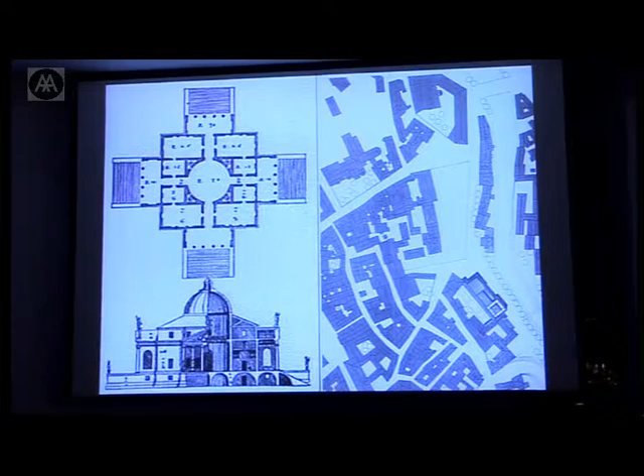Afterwards, I moved on to a master's in Stuttgart University, where I was confronted with new concepts of architecture. One was the concept of the digital. That was in the 90s, and the first wave of digital architecture was very much about creating shapes and pixels that moved in space, and not every single one of these pixels necessarily needed to make sense.

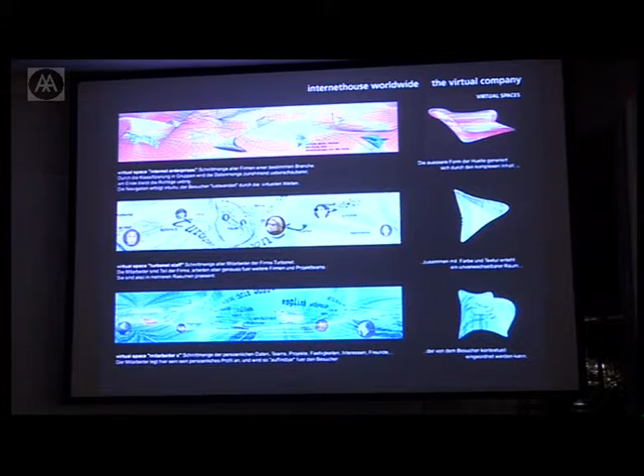My project was about virtual realities, representing real space in virtual space, creating environments in VR caves, where with goggles and data gloves you move through spaces, but they're not real. There's no gravity, there's no environment, but there's perception. You can see these spaces, but you can't feel them, but you're in them.

The second concept was the concept of form finding at the Institute of Lightweight Structures by Professor Frei Otto. Frei Otto at the time said he's not designing, he's finding shapes. He sees himself as a researcher, and he investigates shapes in nature or structures in nature, finding optimum configurations of structures rather than designing them the way you want them to look and then figuring out how they stand up.

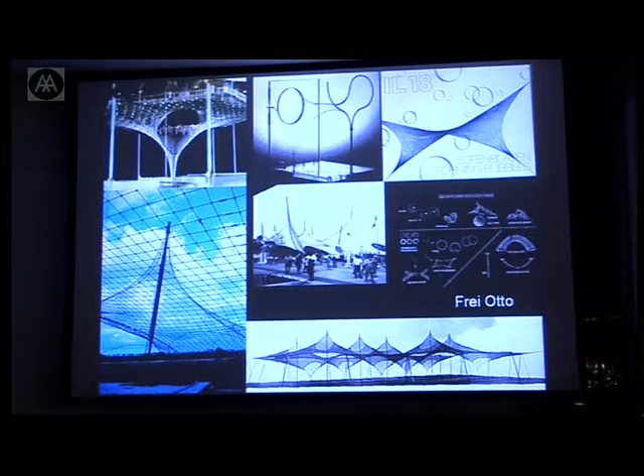One of the most prominent examples is the Munich 1972 stadium, which is entirely based on the surface tension of soap films, and therefore still today one of the lightest and most filigrane structures in the world.

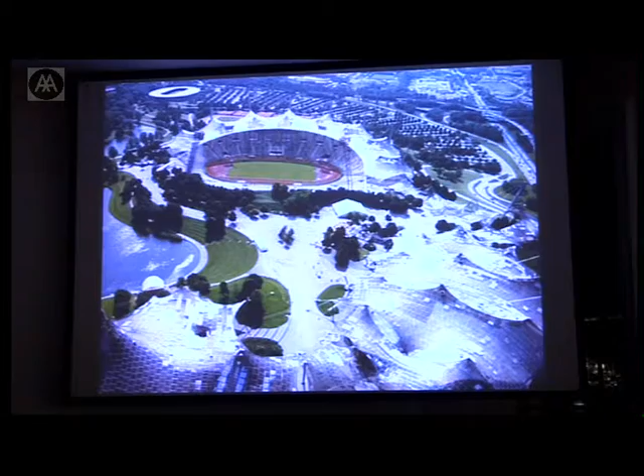Hence my interest in complex systems in nature and their possible applications in architecture, whatever these applications may be, whether spatial, conceptual, programmatic, or as an application of ornament.

As Charles introduced me, in 2002 I worked for a German firm called SMO Architektur, and we participated in a competition in Berlin. One of our students had Charles as a teacher at, I think, the Städel School in Frankfurt, and she suggested working with the Advanced Geometry Unit in London. So we came here in 2002 and had a workshop.

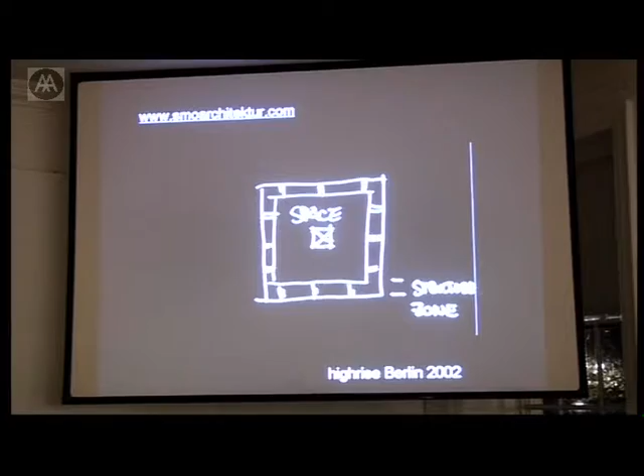The ideas behind the concept were that the perception of current architecture is a pure repetition of floor plans that is then retro-clad almost, and facade is nothing more than cladding of a highly efficient structure that is a given almost by a developer.

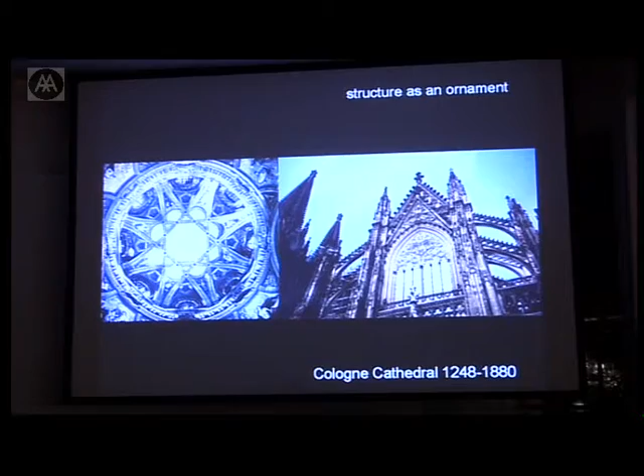While originally structure and appearance went hand in hand, the cathedrals, every element of architecture is at the same time an element of structure, and every element of structure has an architectural expression.

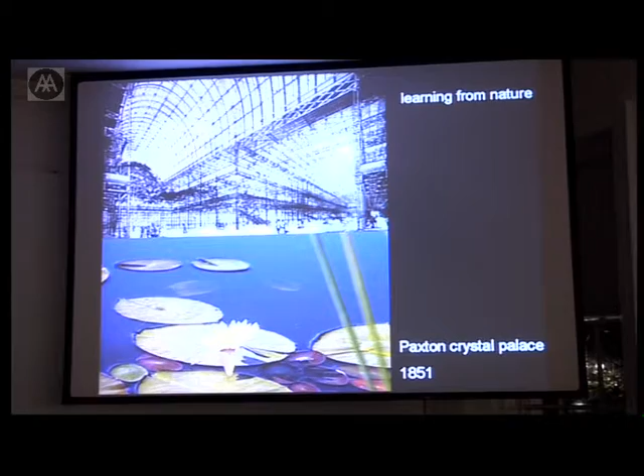Later, Paxton's Crystal Palace and other projects are examples of how this structure turns into the architectural experience and becomes inseparable. And often these structures are learned from nature.

Buckminster Fuller, another person in that field, built this pavilion in Montreal, I think 1968, where you can't really tell what is structure and what is architecture. It's a unity.

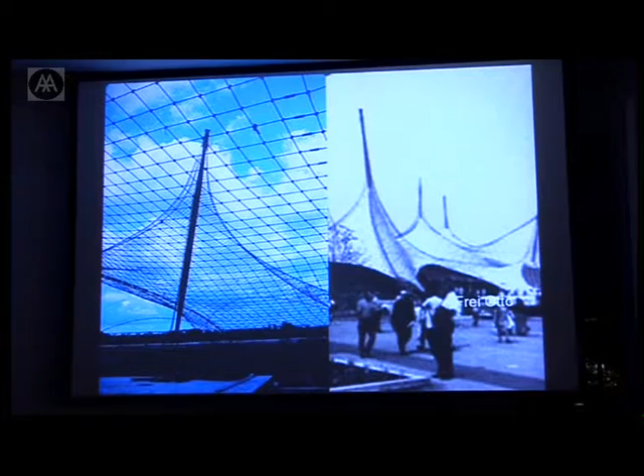At the same time, Frei Otto was building the Montreal pavilion, which later led to the Munich stadium based on surface tension. Frei Otto also wrote a book by the name of Seifenblasen, Forming Bubbles, and we'll see later how this book comes to relevance.

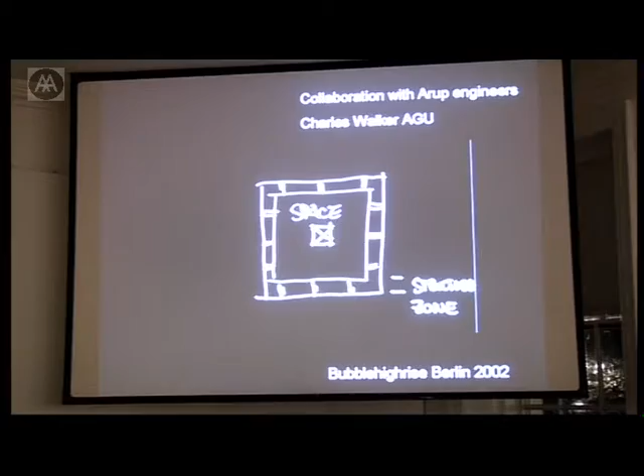The idea for the high-rise tower, and this was basically what we came to London with, was we wanted a structure that at the same time is architecture, a structure that represents nature, natural systems, organisms, and that is not just an extruded floor plate clad with a funky facade.

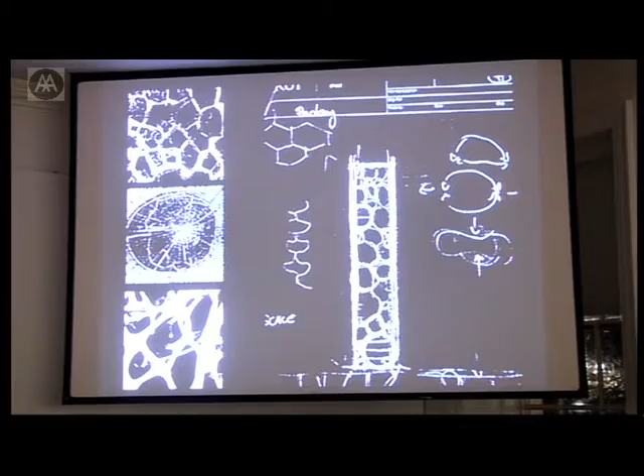After a one day workshop, we had these sketches and the word packing. So packing meant for us, we put spheres in a box and shake the box, and all the spheres would self-organize themselves, leaving the minimal amount of space in between them. So you have some sort of structural package, although highly undetermined or underdetermined.

When we then sliced through this structure, or through this undetermined accumulation of spheres, we would get a slice of somehow a determined structure that we would wrap around the building, so the structure and the facade become the same element.

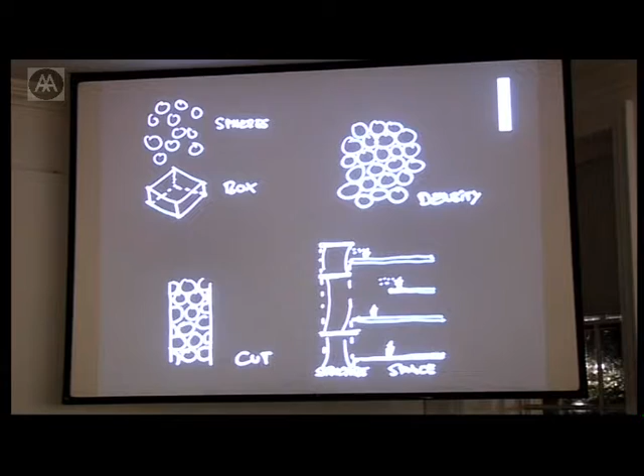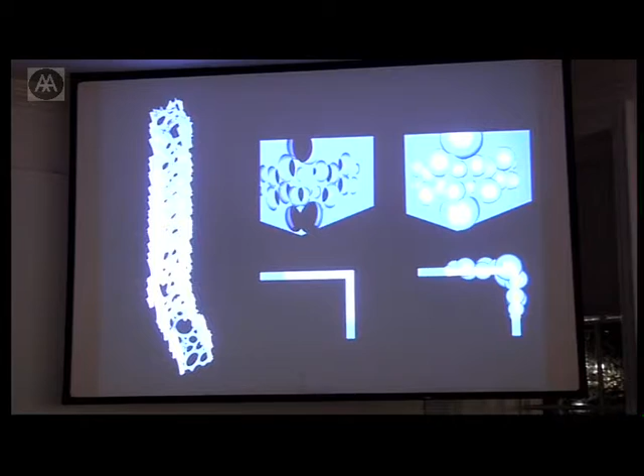At the time, we weren't 100% able geometrically to resolve this problem. What we did was simply modeling the bubbles, the spheres, in Max, and subtracting them from the volume.

About the detail, we had a very blurry idea at the time, and it actually stayed at that level of resolution. But we had a high-rise building that looked highly unusual and looked different from anything else we had ever seen.

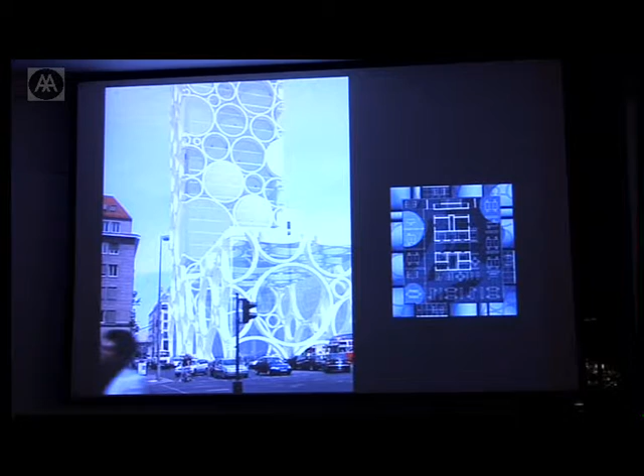Within Charles' advanced geometry group, I think everybody knew we were onto something, but nobody knew what it was. There was a certain excitement about this project. The only person not excited was the developer, who decided not to go ahead with it.

The last thing we heard was this page faxed to us from Charles, which was a copy from the Frei Otto book, that somehow talked about these rings or these spheres under compression turning into some sort of three-dimensional structure or foam or hexagons.

As remote as Australia sometimes seems from this side of the world, it is actually quite close to a lot of places. While Australia has 20 million inhabitants, it also has 20 million border movements every year, so statistically every Australian leaves the country once a year. In America, for example, I think the percentage of travel documents is something below 15%.

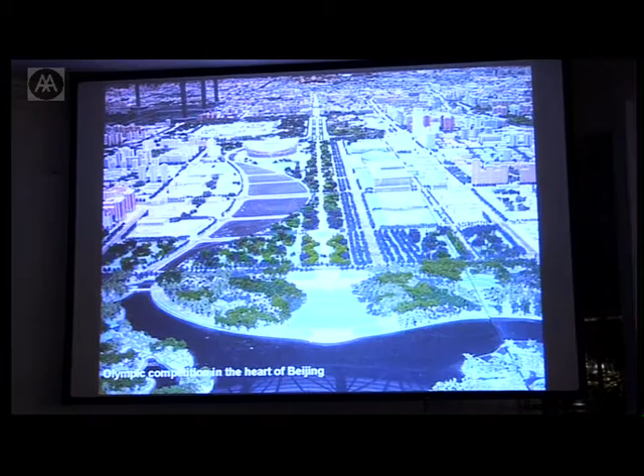We were invited to join an international competition against some of the biggest firms in the world for the National Swimming Center for the Olympic Games in Beijing 2008. The site is in the center of a north-south axis that takes you from the Forbidden City to the north, which is now the Olympic Park.

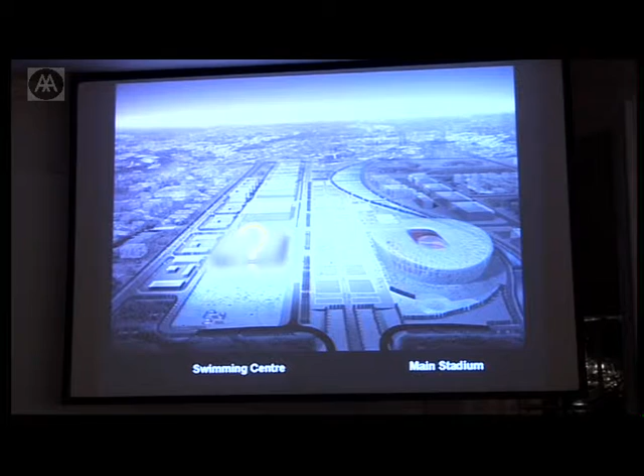You see on this image the team, and the main stadium by Herzog de Meuron, which was a competition that had just been decided at that stage. So we knew what our neighbor was, which is highly unusual for competitions like that—it was almost like designing in an existing condition. We had a big circular building called the Bird Nest, and somehow it was painted red on the inside and symbolized fire.

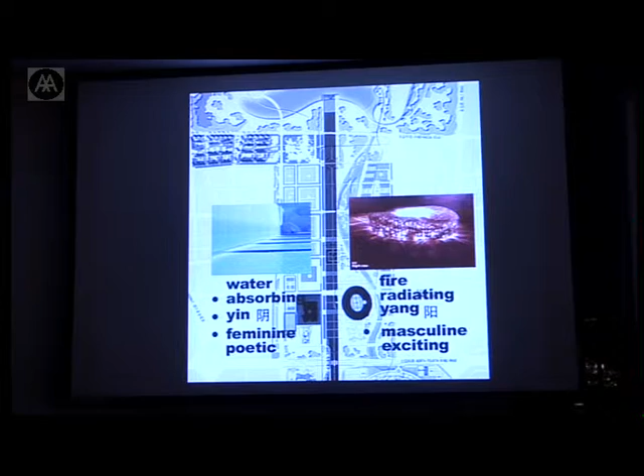Reading the symbolism of the main stadium as a big ring of fire, which in Chinese philosophy stands for yang, you need an opposite, complementary element, which is the yin—in this case water, a feminine counterpart. So we decided on a blue building that interacts with the red building, a square shape, and water as a theme, which made sense building an aquatic center. The square shape is the primal shape in Chinese architecture.

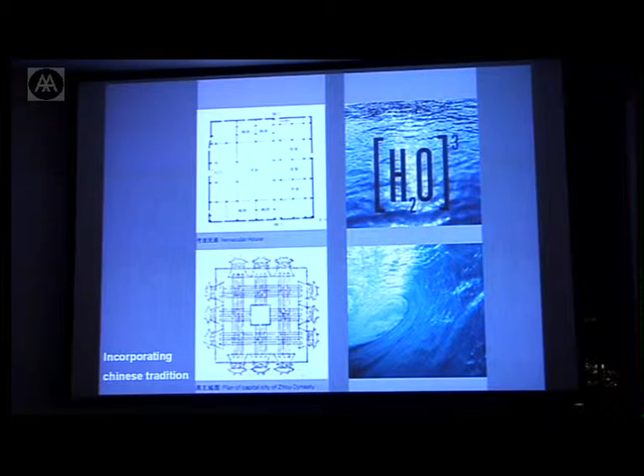The Forbidden City is square. The Summer Palace has a lot of square buildings. The Temple of Heaven is square. The history of Chinese architecture goes back thousands of years, with a strong linkage to the man standing in the middle of a square with equidistance to all sides. So there was a strong reason for this shape, and it also made sense putting a square next to a circle—we had a blue box and a red circle, yin and yang.

So the spirits were happy already, but we had no idea what to do with it. We looked again at nature for inspiration, and this time we looked more into elements of water—corals, bubbles, foam—and more specifically into what could be relevant for our building, creating a building that is not structure plus facade, but structure and facade in one. We applied the system we had previously found, and it made sense as a block of foam, somehow representing water.

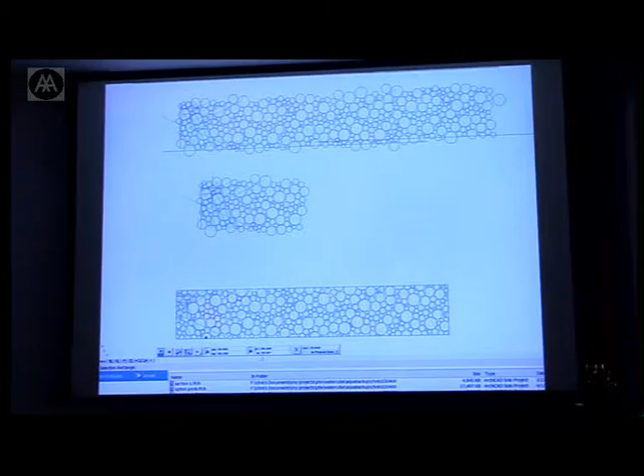Now, as much as the computer liberates us from having to be able to draw everything, it also limits us to what you can draw on this particular program or with this particular computer. This drawing here is a 2D drawing that represents some form of foam, but it doesn't really represent foam because foam is three-dimensional—this drawing is two-dimensional, so it basically reads as an array of circles.

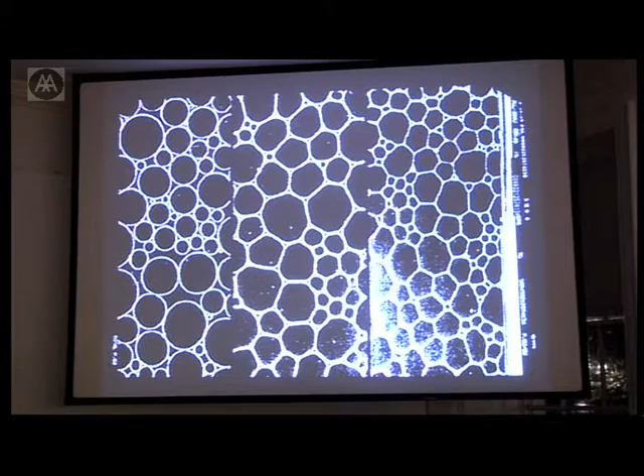Remembering the facts out of the Frei Otto book, we were on the hint to look more into foam. So we mapped the foam onto the building, and all of a sudden we had something more three-dimensional that would fully represent water for us in a built form. It's almost like a block of water.

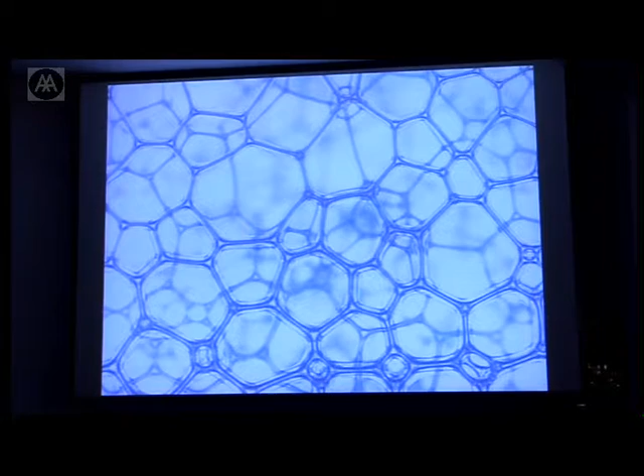That's seemingly a contradiction. Looking closer into the geometry and structure of foam, something that many people have done in the past, you find on Google that there are certain theories about the geometry of foam. One of the oldest, dating back to 1873, finds that all the angles between three adjoining bubbles are 109.4 degrees, and they all join at the same degree. The latest...

foam theory was found on an Irish website by two Irish professors, Professor Weaire and Phelan. They state that if you mix 12-sided polygons and 14-sided polygons three-dimensionally in space, and array them endlessly, you would have a structure that doesn't leave any spaces in between. While our bubble model with the chewing gums earlier left spaces in between, now we have a highly defined package with no spaces in between, and a package that has a very limited number of different edges and nodes.

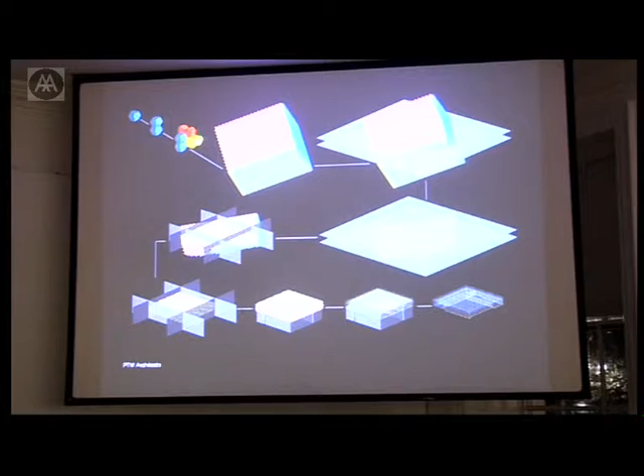So as a principle of how the structure derives from that, we have two different geometries that array in a cluster of six. They array three-dimensionally into a large amount of theoretical foam, theoretical physics foam, that we then slice into the volume that we want to achieve, the volume determined by site conditions, program, and so on.

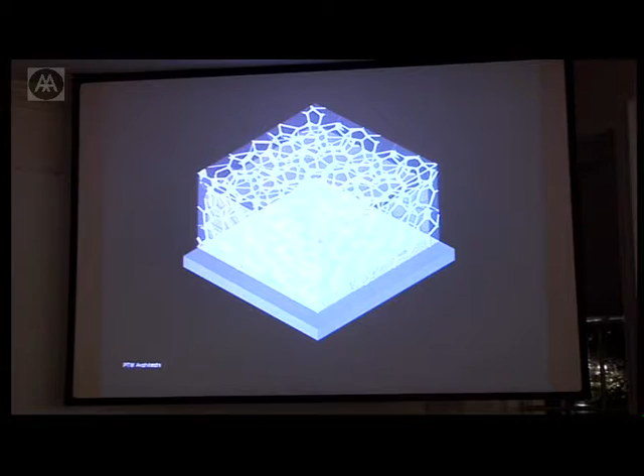And from the first data model, the first three-dimensional computer model, which was so much more sophisticated than our early 3ds Max model, we managed to get a physical model built with a process referred to as stereolithography. I think that's nowadays quite a common tool—you probably have one in the school here too—where you have some sort of resin or powder hit by two laser beams, and where the laser beams hit, the material becomes solid. So any three-dimensional geometry, if you're able to determine it in the computer, you can build it.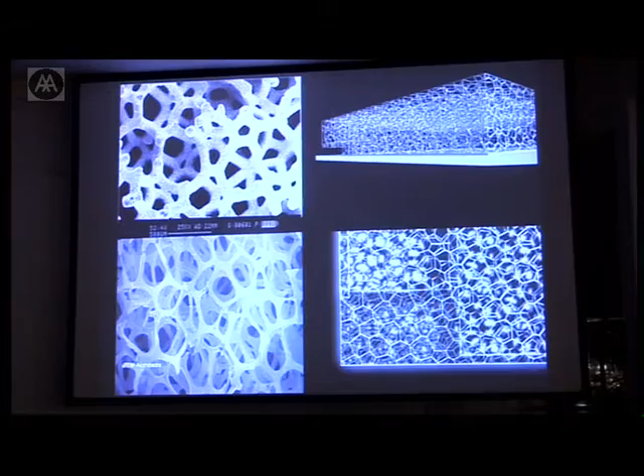And that then arrayed to the entire building, which is 200 by 200 meters and 35 meters high. We have 22,000 elements and 12,000 nodes. Despite the high degree of repetition, when you look at the original images of microscopic foam, there's such a strong similarity that it still surprised us. This geometry apparently is the most common geometry that you find in nature—in little animals, in foam, in coral reefs, and even in the nose of my dog.

This block of foam, 200 meters by 200 meters, 35 meters high, is excavated to accommodate the spaces: an Olympic pool—the biggest Olympic pool in the world—a diving pool, a 50-meter pool, warm-up pools, a leisure center, and an ice rink. All these spaces are literally carved out of the geometry, but they could be in any shape. You could carve out any shape of this geometry, and in theory it would still be stable, because it's fully three-dimensional, and you could put the entire building on its side.

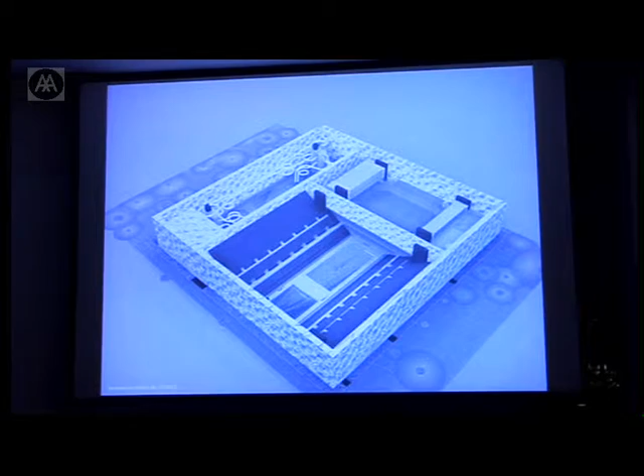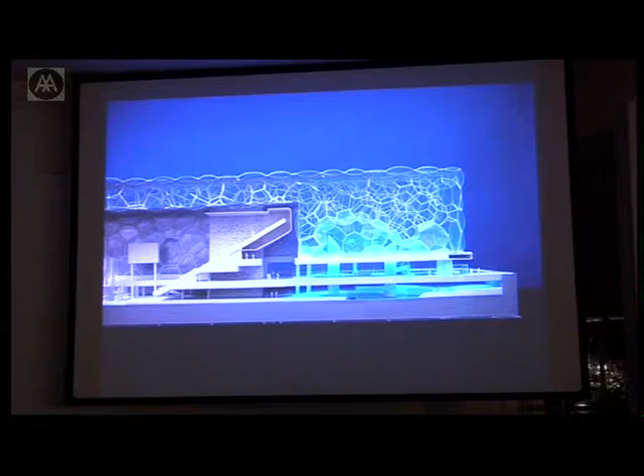It's a non-directional structural system, which proved to be extremely efficient for Beijing, which has seismic conditions—earthquakes. Here you see another sectional model where you see spaces carved out of the structure, and the space on the right we refer to as the bubble bar, which is the restaurant and a sort of VIP bar that sits above the entry. To the left you see two spectator ranks with 17,000 seats and the diving tower.

Talking about models in China nowadays, you have incredible industries of model making, 3D model making as well as physical model making. These guys in Beijing have now specialized in building Watercube models, and they literally build Watercube models and Bird's Nest models on a daily basis. You have these 10 guys, and it's like an assembly belt—everybody has a fixed role, and they know exactly what they're doing. So you can ring them up and get a model built.

While we previously thought nobody would ever be able to build a model like that, they have now figured out how to go from our 3D computer geometry to building it in reality, which is a big step, because if you can build a model, it's more likely that you can build the real building as well.

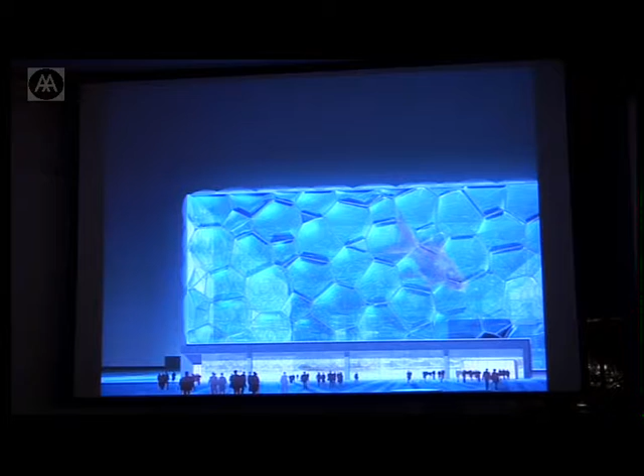This is one of the facade impressions, or the external impressions, where you see the structure and the facade becoming the same element, and the structure shining through, sort of a layering. That is something we wanted to achieve, and we wanted to learn from water as well, this effect of layer, where the eye doesn't know where to stop. It sort of has an endless depth.

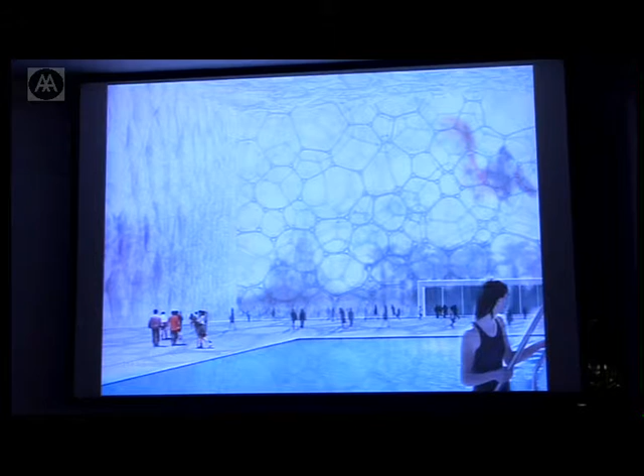And an internal impression of being underwater or under a block of foam, sort of an ephemeral view.

As Charles mentioned earlier, the Eden Project in Cornwall was a project built, I think, 10 years earlier, which uses a facade technology derived from the space industry, whereby inflated plastic pillows are used instead of glass. These plastic pillows can span up to 9 meters, and they weigh only 1% of the weight of a comparable glass structure. It's highly transparent, highly UV resistant, and practically undegradable material.

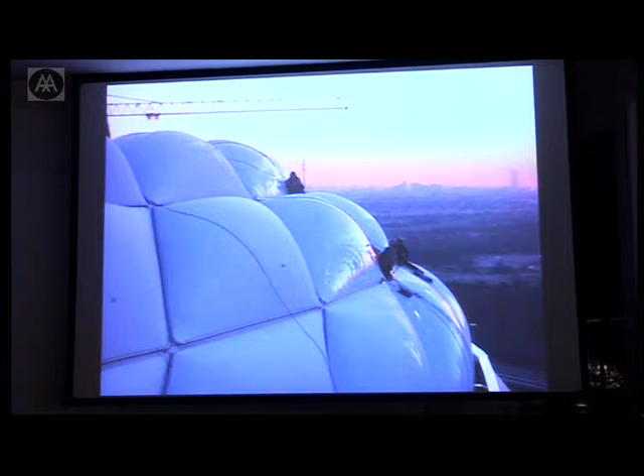The next project of my knowledge is the Allianz Arena in Munich, that has come to fame last year in the World Cup.

So basically it's really a thin film of plastic, 0.1 millimeters thick. You can't imagine that something like that can carry any load, but it's extremely strong, extremely transparent, and extremely undegradable. NASA invented it originally to shield satellites.

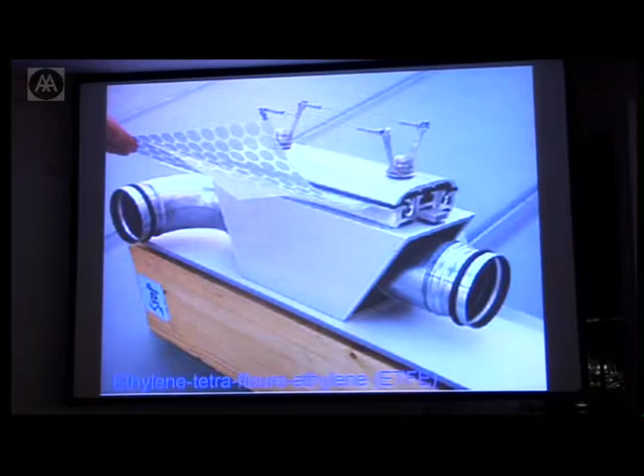The system works so that the foam structure is the internal structure that on both sides is wrapped with this lightweight material. Solar energy is captured in between and can be used to heat pools and interiors. So you create like a greenhouse environment that is highly energy efficient.

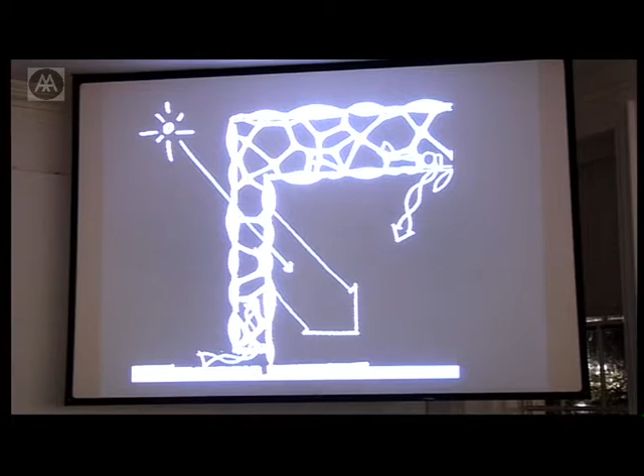And you have a daylight situation. Usually pools are just black boxes, and then on the inside you have to spend a lot of electricity and money to light them again. This is how the system works with clamps.

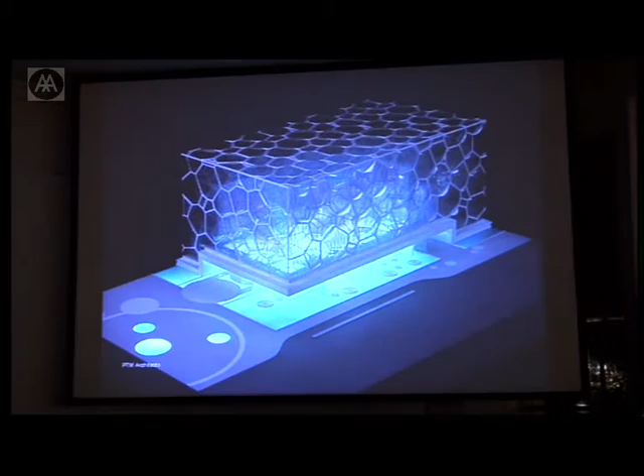That was our competition entry for the National Swimming Center, sitting next to the Bird's Nest. Out of the 10 entries, it was first shortlisted to 3 entries that were on public exhibition.

With an overwhelming majority, the public voted for our building, which was obviously a strong, very nice compliment for us, and a very strong argument that the population accepted the building in its simplicity and yet being so different. It just seemed that these two buildings work together so well that now people say the Bird's Nest got its justification afterwards by adding the Watercube. It's almost like there was something missing before.

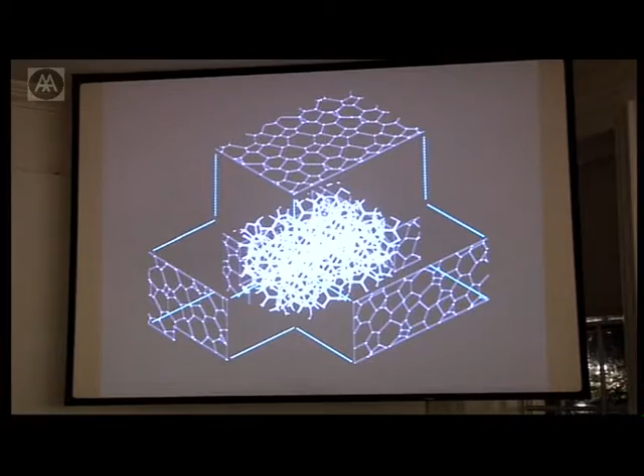From there, every necessary information can be extracted from that model, and our partners from Arup in Australia, and I believe with the help of Arup London, have developed an automated system whereby every single beam and node can be described in this numeric model, can be calculated, can be weighed, can be costed, and can be sent straight to the steel manufacturer from where it gets to site.

And that's probably what 30 years ago, when Frei Otto was playing around with the same ideas, wasn't available, where you would have to build physically every single member and somehow stress test it to be sure what size it should be.

All these elements have different dimensions, and the big advantage is that they carry only the load that they have to carry. While traditionally you would size the biggest member and then all the steel members have the same size, it's a big waste of steel and the structure gets very heavy.

While here, the members carry only the load that they have to, and you have a very efficient structure saving steel. All the necessary information, elevations, anything you need, cutting patterns, can be derived from this model, and the details are all resolved 3-dimensionally within this model.

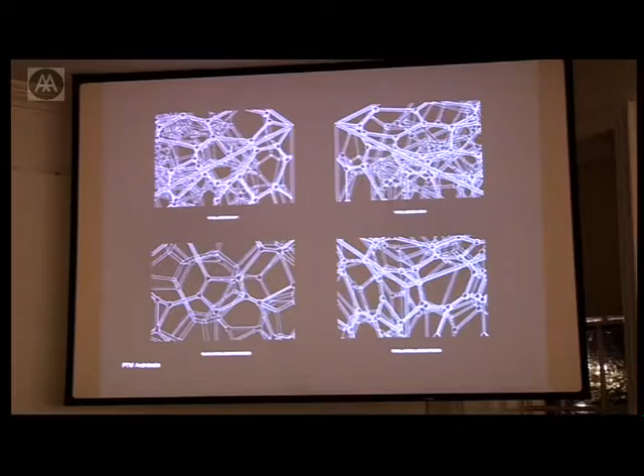For the interiors, again, we were inspired by water and bubbles and randomness and transparency and reflection, and that became an ongoing theme throughout the building.

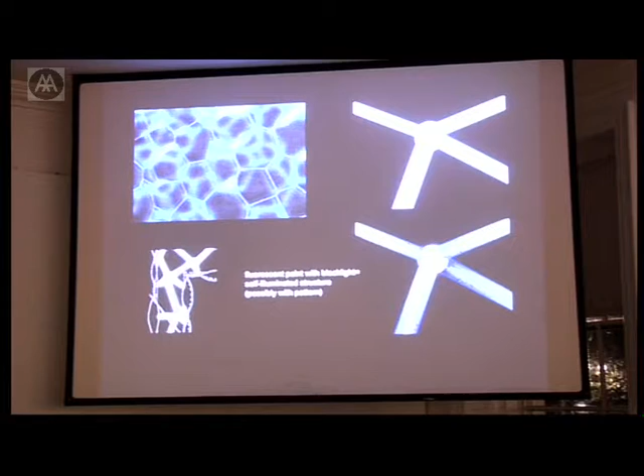The idea of seeing something glowing within the building at night, the idea of painting the structure with a fluorescent paint that glows at night, and the idea of having reflections like the surface of a lake, something undetermined, not a light here, light there on a grid, but light that moves around the building.

Doesn't run very smoothly here, but with these buildings or with this material, it's probably very difficult. Light is always very difficult to simulate, but in particular if you have all these different layers of the structure, all these layers of plastic material that absorb the light differently, it's almost impossible to really predict the final outcome. This was one of the attempts.

Using LED technology, you can achieve any color you want. And with great power comes great responsibility, because 3 of these colors obviously we don't want, and we have to somehow avoid that someone ever switches the yellow on.

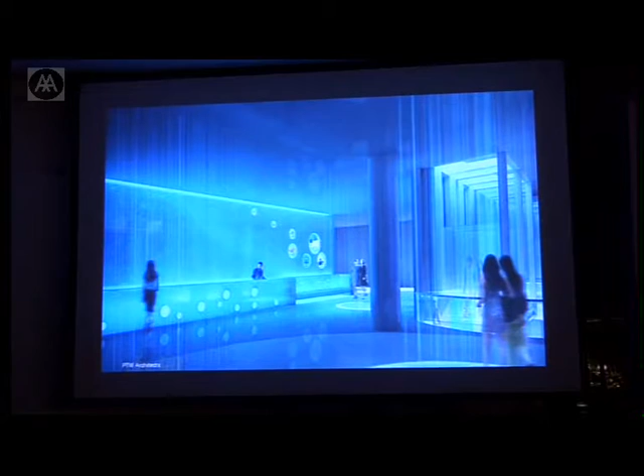The interior is only briefly the concept of randomness and sort of softness and blueness goes through the interiors, with all the corners being rounded.

Random light circles. To our big surprise, in 2004 we were invited to the Venice Biennale, and when we arrived there we got awarded the award for the best project in our category, which was previously unheard of for an Australian company.

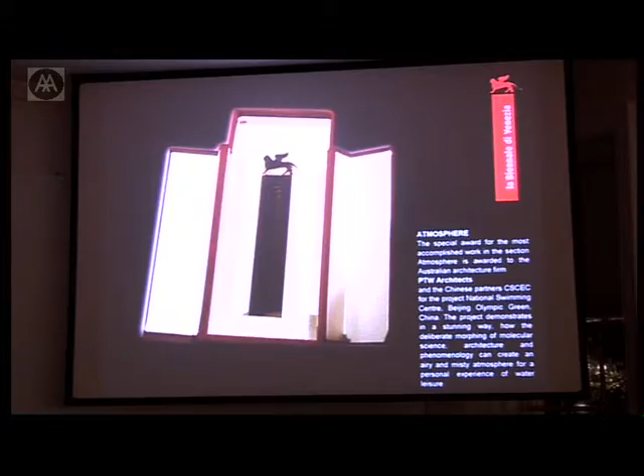And soon after, the project got into construction. So again, working in China makes things different. In China, you don't prefabricate a lot of things. You make up for it with a lot of manpower. So on the first day of construction, the groundbreaking ceremony, 2,000 site workers showed up, and these 2,000 people would keep going for the next 2 years building this building with great pride.

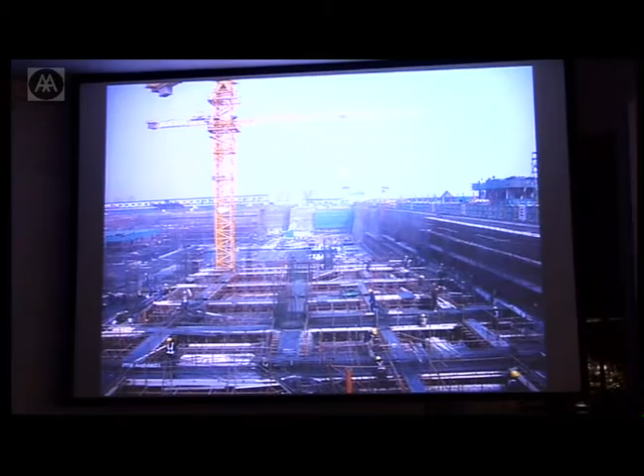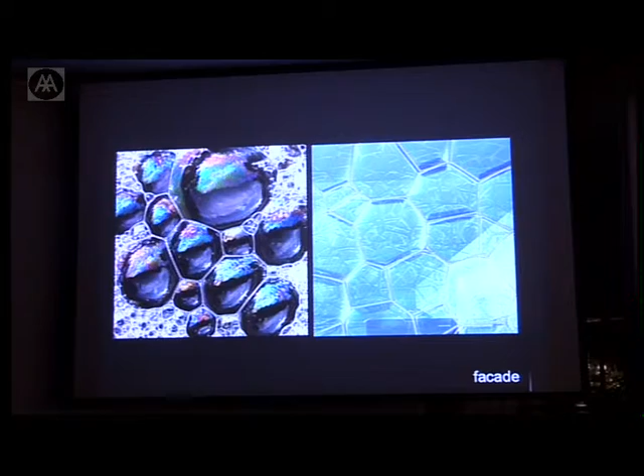Starting with a big excavation. Again, it's 200 by 200 meters, and these are just a few impressions of how many people are involved and what they do. And at the same time, always trying to maintain the initial ideas.

The facades, we did a lot of samples. Because it's so hard to visualize it in the computer, you need to build prototypes, and you need to test the light, you need to see how the reflections work, you need to see how it reacts to illumination. These silver dots that you see, they're solar protection, because the material lets so much UV light through that you have to keep it out to an extent. So there are different densities of silver fritting.

This prototype is in scale 1 to 2, so in reality it's twice as big. The color was a big question too. We drew it always as a blue building, but we thought like blue as in the sky is blue. These people made it actually a blue ETFE, and it was way too blue for us. And so we asked them to revise them and come up with more prototypes and different colors and different transparencies.

A lot of testing involved, because there's so many layers of ETFE, you have to put them all together and really see what they do in combination. And this was the final prototype, which came pretty close to our ideas of transparency, translucency, and the shadow casting, shadow playing on the different layers.

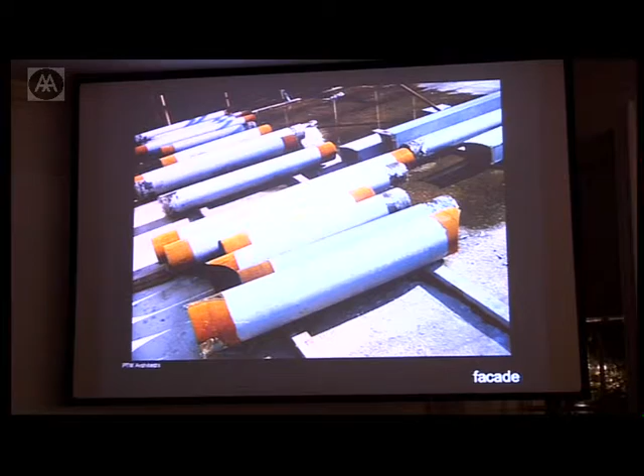And now it comes to the structure. And when I said there's not a lot of prefabrication, obviously every single steel element was prefabricated, but individually. We always thought that they would build entire parts of the building in big workshops and then helicopter them on site and drop them on site, because it's so highly complex geometrically. But what they did was building every single element, and every single element that came out of the three-dimensional model that was sent to the steel manufacturer.

These are the nodes. And then was literally site welded by 400 specially trained site welders.

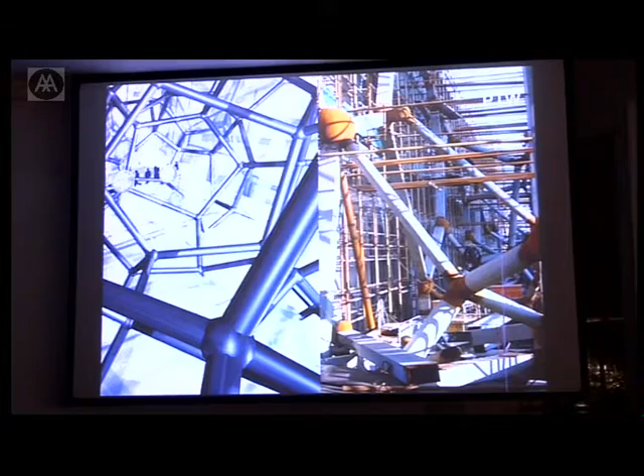The simplicity of this construction is almost undescribable, but in some way there's a strange mix between totally high-tech, you have this highly sophisticated 3D model, you have everything set up, and then you have bamboo scaffolding and a few people carrying the nodes around. So it's what we refer to as Midtech. It's using high-tech and low-tech at the same time and somewhere meets in the middle.

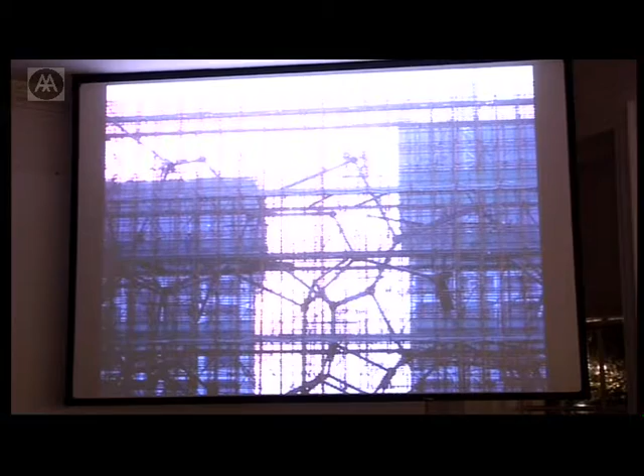To give you an idea of scale, there are 2 people climbing on one of the bubbles. They are 7 to 9 meters in diameter. Those were the first bubbles mounted on the facade, 500 square meter model, mock-up. And these guys are in charge of how many bubbles are applied already and where the next 500 come from.

So again, very analog process. And wheelbarrows, and lifting the nodes in position and welding them on.

Interestingly, because you work with a 3-dimensional model that is so highly determined, you don't build up inaccuracies, because every single node is positioned exactly. Then even if you get one node a few millimeters wrong, the next node will be positioned exactly again. So it's not like you start at one end and then by the end you come to the other end, you're 1 meter off.

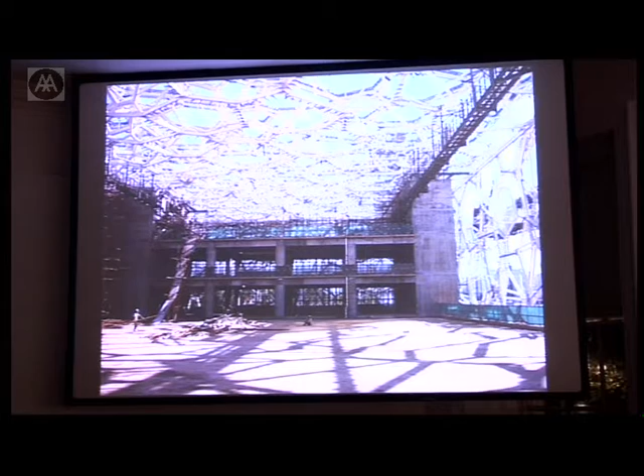These are the first interior impressions where it started to show how the shadow casting and this sort of surreal interior seem to work.

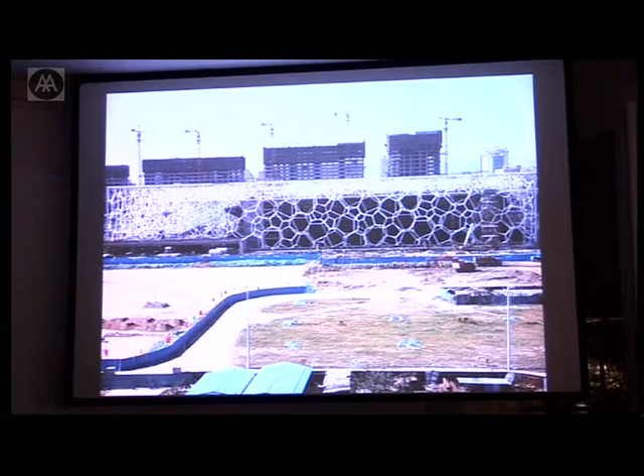This is the view from the bird nest, and you see here the bubble bar on the left, what I was describing earlier. The area which has a lot more structure and where the space is actually inhabiting the structure.

Yeah, these were the photos of sort of 6 months to 8 months ago. I want to quickly show you a few other projects before I show the latest photos that were taken 2 weeks ago. We were very happy to see the project showing up on Google Earth for the first time.

That is somewhere halfway through construction last year. So as a spin-off from this large-scale big project, we have initiated a series of smaller scale projects that are of more experimental nature, or of similar experimental nature probably, but of a much smaller scale.

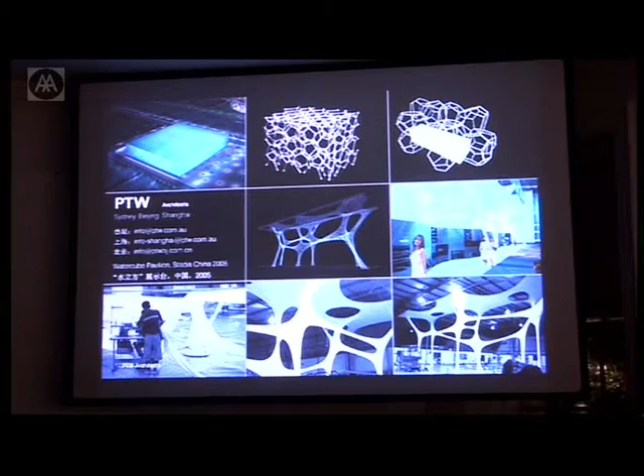They are temporary pavilions that are transportable, that can be carried in a bag and built up within a very short time in a venue. This animation shows a pavilion that was built for Moet Chandon for a race course VIP lounge at the Melbourne Cup last year.

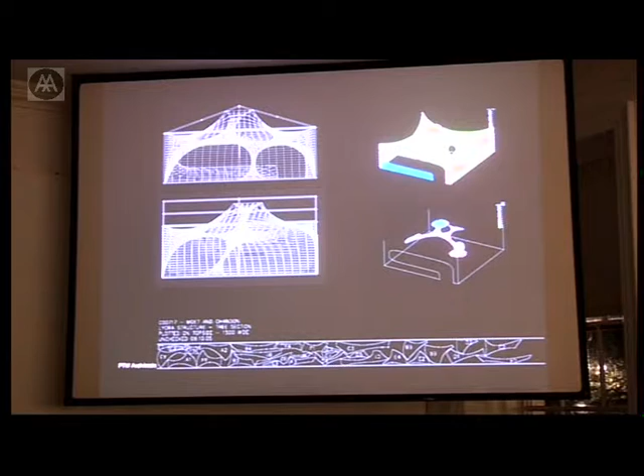So again, starting with 3-dimensional modeling and a 3-dimensional description of the geometry. The geometry is then broken down into individual pieces with a sail-making software, a stress analysis that comes from sail-making, and then you have this pattern.

And this pattern, nobody would believe that you can put it back together and it makes any sense. But the computer calculates how to break down all these double curves, including the stretch of the material, to seamlessly put them back together.

The space was only 10 by 10 meters, and the daylight naturally filtered through the ceiling and left these spots, casted these shadows of spots.

The funny hats, by the way, I think you have this tradition in England as well, to wear these hats for horse races. So there was like an interesting contrast of this cyberspace interior and this sort of last century headwear.

The spots were an interesting way of creating patterns, as they were created by the sun, and when the sun was there they casted spots. When the sun went away, when a cloud came on, the spots disappeared, so the whole building was constantly moving and reconfiguring.

So after having studied Palladio, where all the proportions are following certain rules, and all the dimensions are fixed, the question is, if you do these sort of projects, what are your parameters and how do you make your decisions all of a sudden?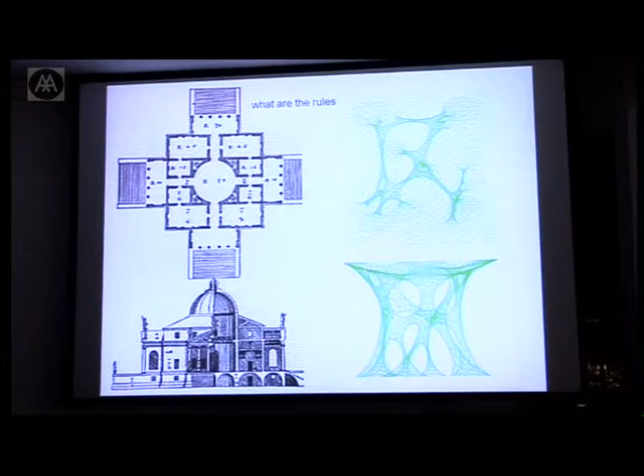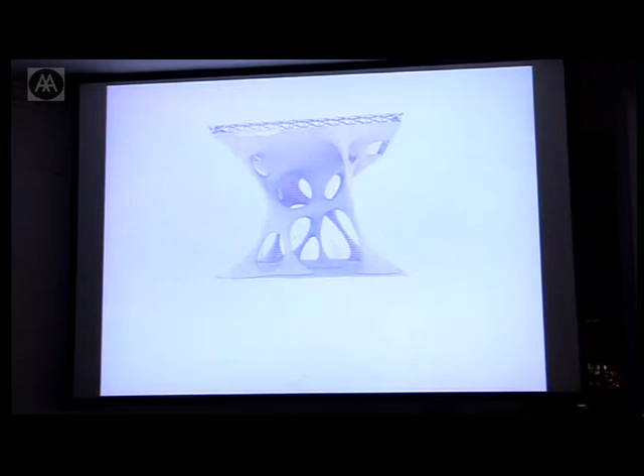These sort of buildings look different from every single angle. There is not even an elevation. You can't draw an elevation of something that is so three-dimensional because it doesn't give you any information. You have to look at it three-dimensionally.

And I guess that different to the blobs that I was talking about in the beginning, now decision-making can be based on material efficiency, for example, like in Frei Otto's early soap bubble experiments, can be based on advanced computing where individual parts of fractals are put back together and achieve an economy of material, economy of means, spanning large structures, weighing less.

Packing this space into a small bag, transporting it to space, and it adapts to the space. And the sort of different levels of scales of having the total and then breaking it down into different cells and different fractals that are a fraction of the whole.

What's the material you're using there? The material is a fabric, which is a nylon derivative. And so the material stretches. And for this particular project, we filled 500 cubic meters of space with 17 kilograms of material, which is with any other material unheard of.

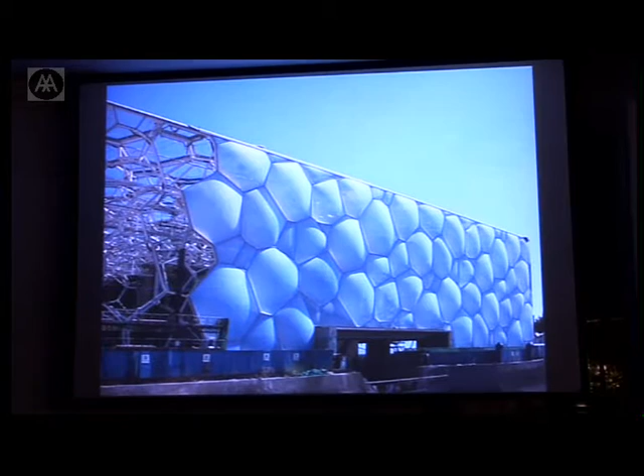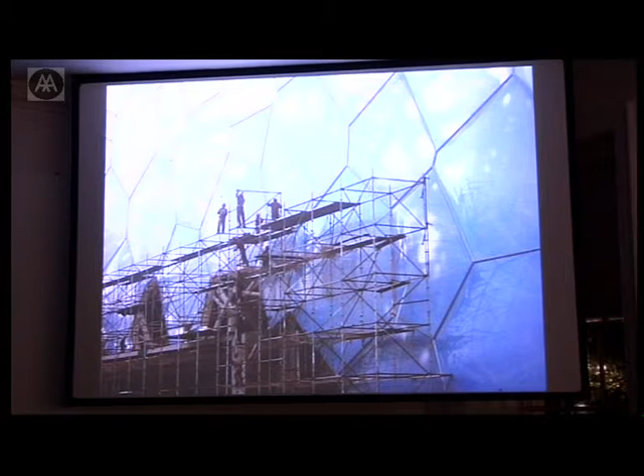These facade pillows have really proven to be so versatile in different lighting conditions. Sometimes they look very flat, sometimes they look very bubbly, sometimes they're transparent, and sometimes they look like aluminium panels. You really only understand the building when you see people and a scale in comparison.

And it's incredible seeing these sort of unsophisticated building methods leading to such a high-tech result. The whole building, by the way, was built for $100 million US, which is the equivalent of the Prada shop in Tokyo, for example. So I believe in the future cost is sort of a different issue too. There will always be the highly luxurious, fantastic projects that can afford to spend a lot of money for high-tech brands, but there's also architecture that has to be affordable, that has to be built with normal means, normal technologies, but smart technologies.

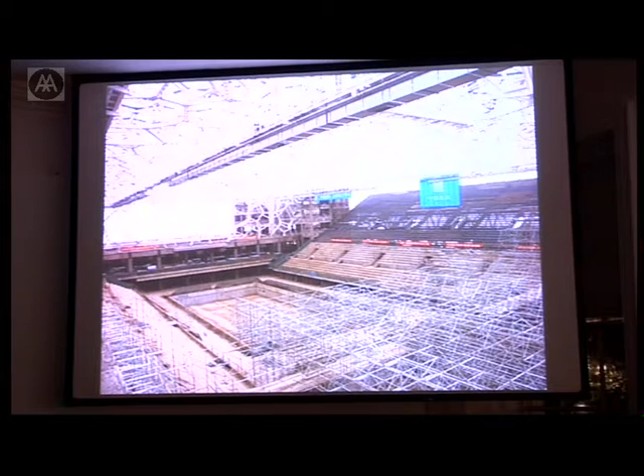The interiors are currently in this state. We are promised that the building is finished in 6 months. We have a few doubts about that, but having seen the 2,000 people on site, they probably will finish in 6 months. The scaffold here is another sign of sort of low tech. The entire building is scaffolded. The entire box was built in a scaffold before the building was built, and the scaffold actually was heavier than the steel structure of the building and more expensive.

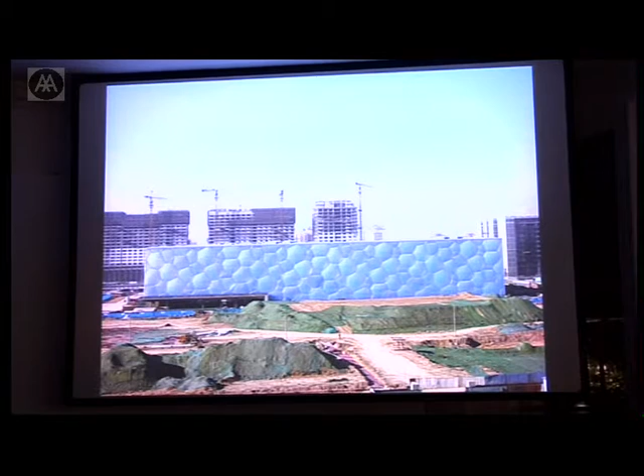The big Bird's Nest is nearing completion as well. And we got this photo sent from Herzog & de Meuron, so they don't seem to be that unhappy with their neighbor. It certainly has a lot of public attention. On that weekend, I was there in December last year. It was on 4 out of 5 national newspapers in Beijing.